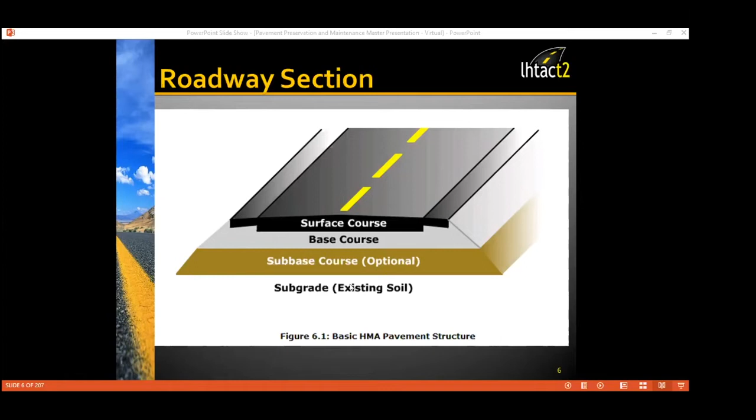So pavements are like the hat for the ground. They keep the water out and away, and in addition to that, they spread out the load. It's good to spread the loads out, or we'd be all driving on rutted pavement. We're also keeping the original ground dry, which is important, especially where the ground is soft and doesn't drain very well. We don't want to wear away materials that we have in place. We could also be faced with environmental issues if we were washing a lot of material off the roadway and into various drainage systems and streams.

Brent, your voice is fading just a little bit. I'm not sure if there's a microphone that needs to be adjusted. Okay, how's this? That's great, thank you.

All right, okay, so it's important to start the road building process with good materials, especially if we're rebuilding the road or putting in a new roadway, that are properly sized. So a sieve analysis allows us to break the materials into various sizes, and it provides a means to specify materials.

So if we're building a brand new roadway, typically we'll put into our contract, or specify somewhere, that we want a certain size of material.

So soils are generally classified into gravels, sands, silts, and clays.

A sieve analysis, or gradation test, is the procedure used to assess the particle size distribution or gradation of a granular material by allowing it to pass through a series of sieves of progressively smaller mesh sizes.

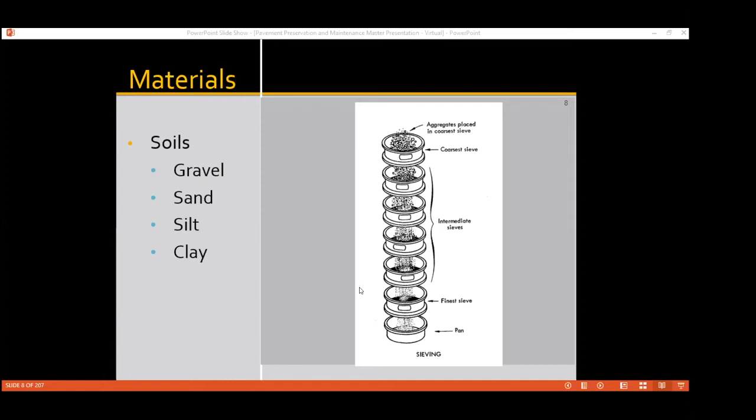A sieve analysis can be performed on any type of soil. We're not live here so I can't get a lot of feedback, but I'm curious if anybody has ever been involved with or used sieves or done sieve analysis - type something into the chat room and let me know. It's very important that as we build roadways, we have some way of classifying the material, and sieve analysis is really the best way to do that.

So this gives us an idea of what the sieves look like. Sieve sizes are given in inches. From the 1/4 inch on up, it's denoted by inches, and from the 1/4 inch on down, it's measured by the number of wires per inch in the sieve. So if somebody says, I have a number 30 sieve, that means you've got 30 wires per inch, all the way down to the finest sieve, which is number 200, meaning 200 wires per inch - pretty fine material. You can see from the picture what the various sizes of sieves look like.

It's important to have material that does not swell - swelling material really kills us because it heaves the roadway. Why wouldn't you want too many fines in the base material? Well, excessive fines will hold moisture and weaken the base. So when the base fails, no amount of pavement preservation will help you out. When we put down the base course - remember that's the layer below the asphalt layer - we want it to drain really freely, so we don't want a lot of fine material. That's why sieve analysis is very important when specifying something like a 3/4 inch minus gravel base.

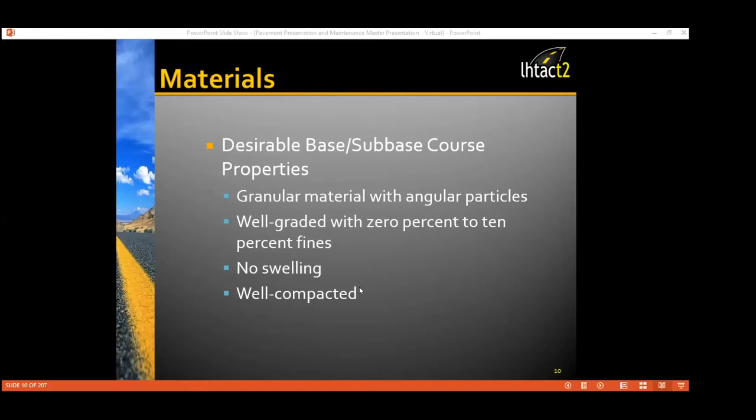As we look at some desirable properties for asphalt pavements, aggregates used in asphalt mixes need to be hard, really hard inert materials, such as good crushed gravel. Properly selected and graded aggregates are mixed with asphalt cement to form asphalt mixtures - I commonly refer to it as just mixing up black goo and rocks. Aggregates form the principal load-carrying component of the mix, and typically in asphalt mixes, the aggregate makes up about 90 to 95% of the mix.

Asphalt content typically ranges around 6%, 7%, sometimes 5%. So you can see most of our pavement is made up of aggregate, and that's where we get most of our strength, because the aggregate, if well graded and angular in shape, has point-to-point contact. If you add up all these little points, it really makes the pavement strong. Aggregates containing foreign matter such as vegetation, soft particles, clay coatings, clay lumps, and so on are not satisfactory to use in asphalt pavements.

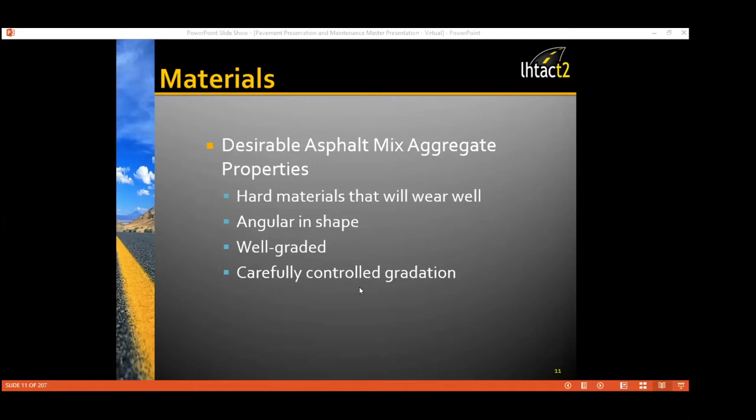Clean soils will have less than 5% fines, and dirty soils will have more than about 12% fines. So when we put our asphalt pavement together, we want material that's really well graded - we don't like a lot of fines in there, since that really lends to its strength. So we want a really carefully controlled gradation, which is why sieve analysis is really important in being able to put together our pavement mixes.

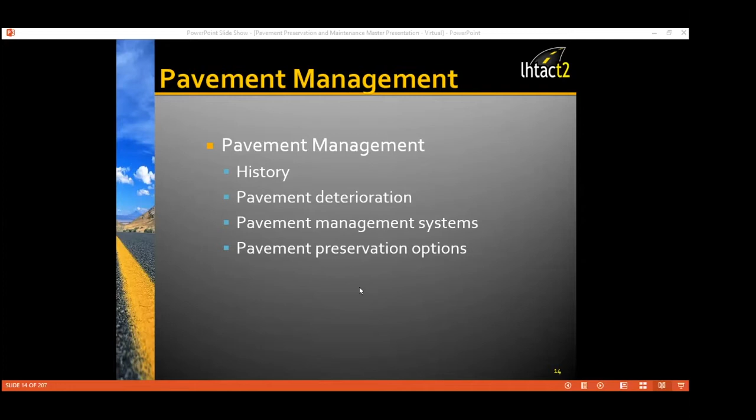So budget planners and managers want to know how much money it's going to cost to maintain a pavement to a certain condition level so proper planning can take place. We want to know how we can obtain the longest possible service life at the lowest possible cost, how many dollars it's going to take to maintain the roadway back to a desirable condition. And we certainly want to provide the public with safe roads.

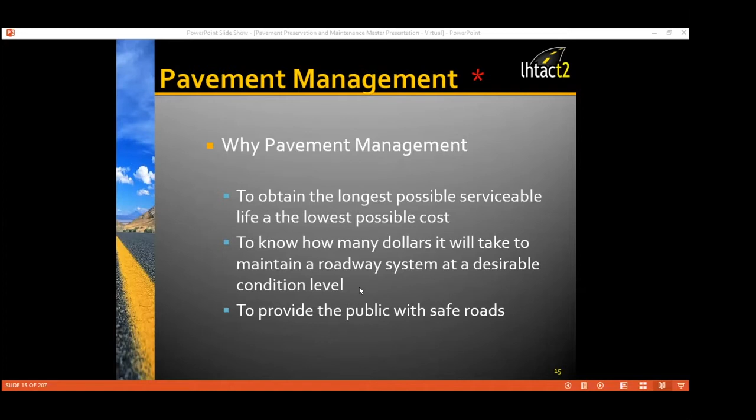So in the past, without some kind of management systems, roads got maintained either by a worst-first approach or prioritization through some kind of a politics process. Maybe that takes place even a little bit today. Hopefully not. But worst-first usually resulted in allowing the roadway to deteriorate to a point of complete failure, and then it got rebuilt.

So do you think any one of these strategies would result in the most efficient method for pavement management and the expenditure of tax dollars? Not really, but before agencies got into pavement management systems, this was the way that they did business.

We're going to go ahead and attack it worst first, which means we're going to spend a lot of money to fix the roadway that's in the worst shape, or perhaps you had some politician telling you where you're going to go spend your money and what you're going to go do first. But we can do better than that.

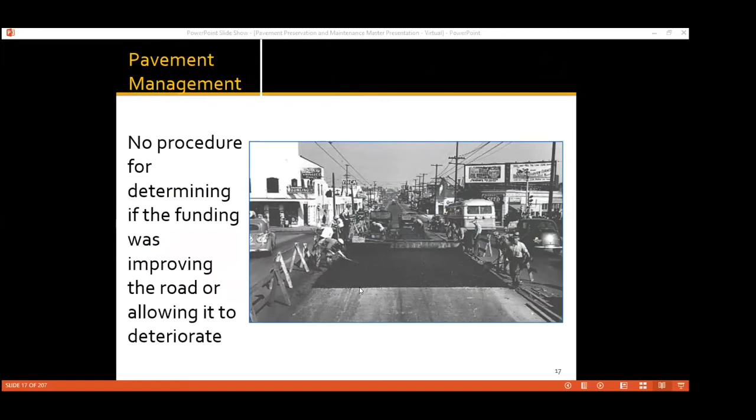So pavement management systems came along to help us prioritize our work. And without some kind of pavement management system, we really never knew if you were making progress or falling further and further behind in the maintenance of your roadway network. Determining if progress is being made was just kind of a bit of guesswork, because there was no procedure for determining if funding was improving the roadway or if we were just allowing it to further deteriorate.

So we needed an approach that would be quantifiable and objective, something we could kind of wrap our hands around. We were able to predict what pavement would do in the future as far as deterioration goes, and that we were able to recommend cost-effective pavement treatments so we could ensure that the money was being spent wisely.

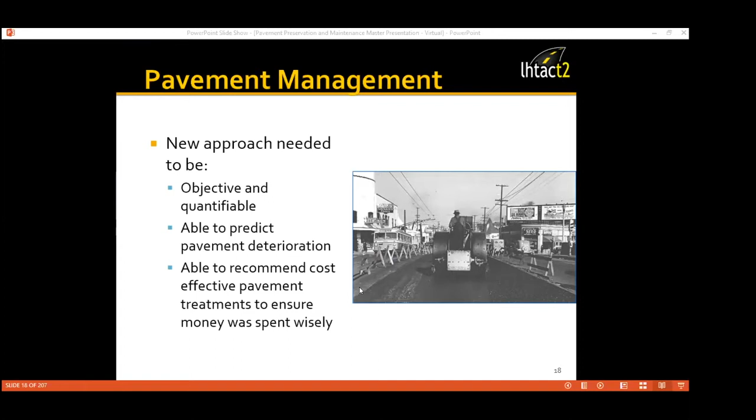And we weren't just going to let the roads fall apart and attack them from the worst-first scenario. We were going to try to preserve the pavement as it started to deteriorate. So in order to get out of that rut, a new approach needed to be developed.

So computers came along and they really had the ability to perform some kind of pavement management capabilities. Research has really shown us that it's far less expensive to keep a road in good condition than it is to repair it once it's deteriorated beyond hope. This is why pavement management systems place priority on preventative maintenance of roads in good condition rather than reconstructing roads in poor condition. In terms of lifetime cost and long-term pavement conditions, this results in better system performance of your roadway network.

Highway districts that concentrate on restoring their bad roads often find themselves circling into a black hole. You're restoring your bad roads, and by the time you've restored that road and spent all the money on it, all the rest of the roads have gone downhill to the point of no return. Now you have to jump over to those roadways and fix those, and you just get into that vicious cycle. Hopefully pavement management systems will help us determine the place to spend our money.

So I want to talk a little bit about preserving the roadway versus reconstructing the worst first. Years of pavement condition data shows that it's more economical to preserve the roadways rather than delay the repairs. As traffic levels increase, the cost of delaying repairs increases dramatically. I'll show you that in just a moment. It's not a linear relationship as far as the deterioration of the roadway - it gets to a certain point and then really drops off. So repairing the worst roads first is a very expensive way to operate your roadway system.

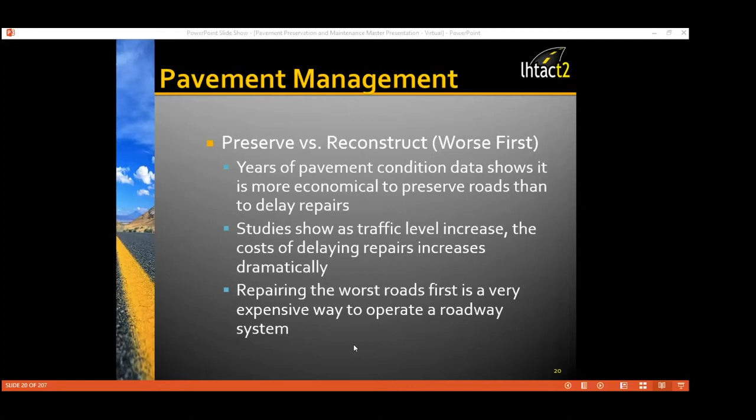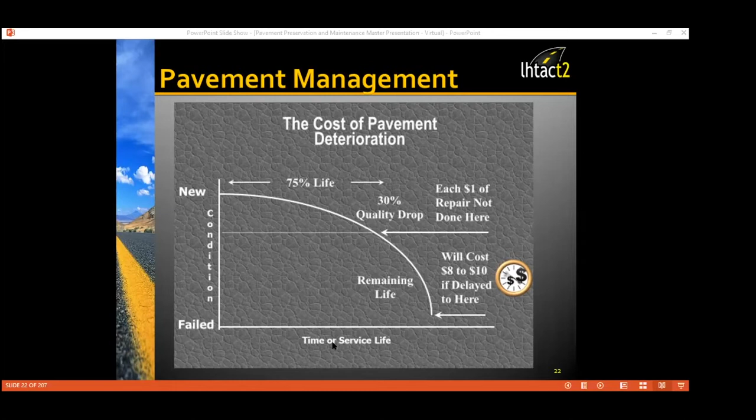So you can say it's like the Fram oil filter guy, pay me now or pay me later. But it's amazing that pavements get to a certain point and it's not a linear relationship, they just really drop off and will deteriorate quite rapidly if we don't maintain them. So the problem is pavements will deteriorate and those costs will increase dramatically if left unchecked.

So what causes the deterioration? We have two big causes that come to mind. The first cause is environment. We can think about the environment as the weathering of the pavement, or oxidation is a term that is commonly used. The second big cause of pavement deterioration is traffic loading. We can all agree that traffic is increasing all the time. In the area of the state where I live, traffic is going up quite substantially, especially truck traffic.

Utility cuts will cause the pavement to deteriorate. In fact, many agencies have policies in place whereby if we overlay the road or put down a new pavement, unless there's some big extreme emergency, we're not going to allow the utilities to cut the pavement for a certain period of time, or we won't allow any cuts. Sometimes it's like 3 years, sometimes it's 5 years, so every agency kind of has their own set of rules.

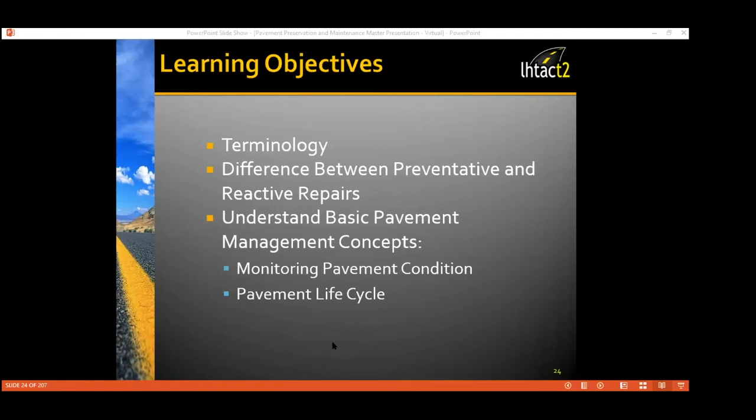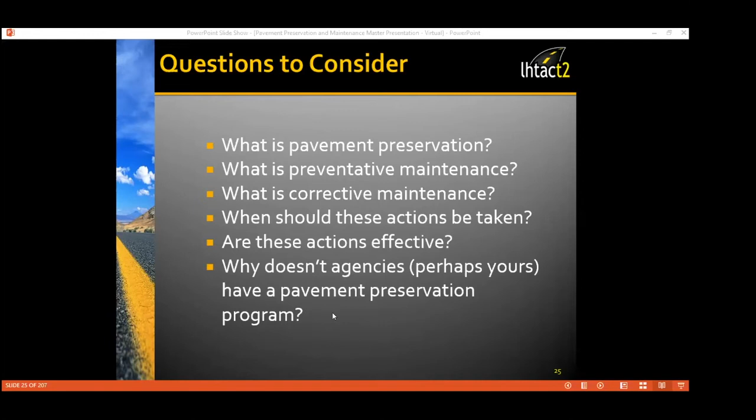So here are some questions we want to ask ourselves, some things to ponder. What is pavement preservation? We want to talk about what is preventative maintenance and what is corrective maintenance, and what is the difference between the two? When should these actions be taken? Are these actions of pavement maintenance management effective? And why doesn't your agency have a pavement management preservation type of program? These are just some questions to consider as we go through our slides.

AASHTO is the American Association of State Highway and Transportation Officials, and they have come up with a bit of a strategy definition: the planned strategy of cost-effective treatments to an existing roadway system and its appurtenances that preserves the system, retards future deterioration, and maintains or improves the functional condition of the system without increasing structural capacity. So that's their definition of effectively maintaining or preserving the pavement system. When we talk about structural capacity, we're talking about adding something to the roadway that will increase the load-bearing capacity of the roadway.

When we talk about preventative maintenance, we want to talk about planned maintenance, maintenance performed on good pavements, contributions to the long-term performance. When we think about preserving the pavement and doing preventative type maintenance, some things come to mind.

Some examples are fog seals, chip seals, and maybe putting down a thin overlay or thin hot mix asphalt overlay. This helps prevent deterioration of the roadway.

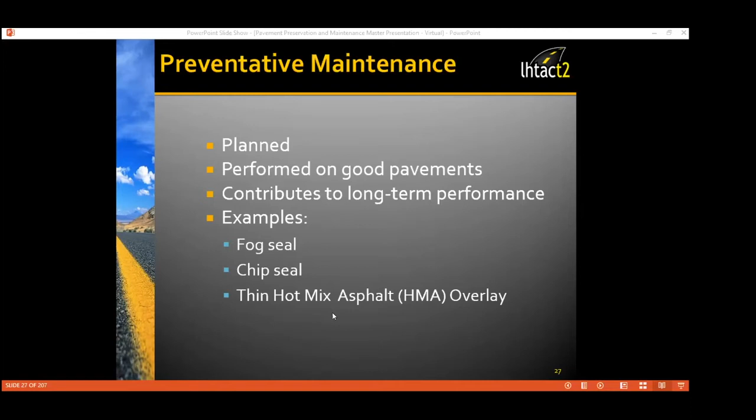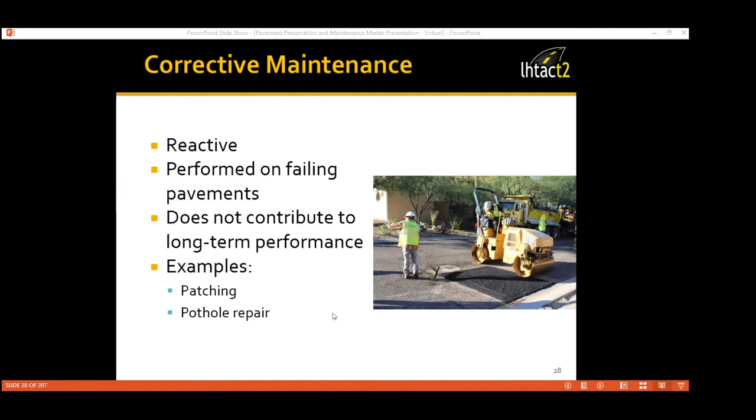Corrective maintenance we can think of as reactive. We're performing maintenance on pavements that are failing. A lot of times reactive maintenance does not contribute to the long-term performance, and it costs a lot of money to bring that pavement back up to a like-new condition. Some examples of this reactive nature are patching and pothole repair.

When we look at the system as a whole, pavement preservation is concluded to be a combination of corrective maintenance and preventative maintenance. Those two categories together give us our pavement preservation program.

The National Highway Institute sums it up this way: it's the sum of all activities undertaken to provide and maintain serviceable roadways. This includes corrective maintenance and preventative maintenance, as well as minor rehabilitation projects. When we think of minor rehabilitation projects, we might think of those thin lift overlays.

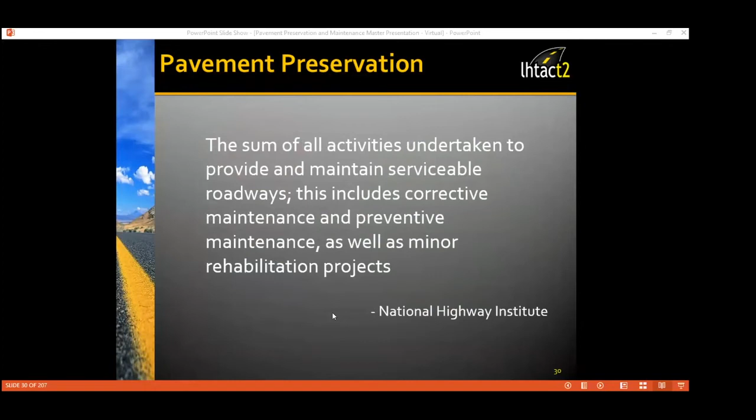When we look at undertaking work to extend the service life of our existing pavement, this includes restoration, such as placing an overlay. It also looks at other work required to return the roadway to its existing or original condition. We want to put in the work required to return the existing roadway to a condition of structural and functional adequacy.

When we talk about the structural adequacy of the roadway, we're talking about the load-bearing capacity. When we talk about the functional aspects, we're talking about things like lane width and how the roadway functions.

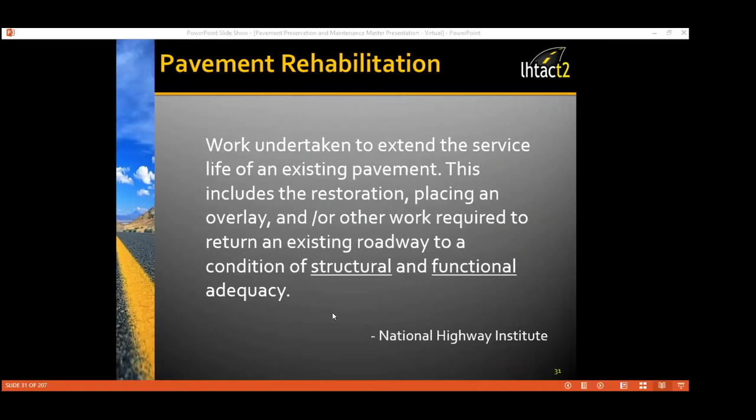This is where we sometimes take the biggest hit: if we go out and start doing preventative maintenance work, the public might perceive us as, why are you going out there and working on something that appears to be brand new?

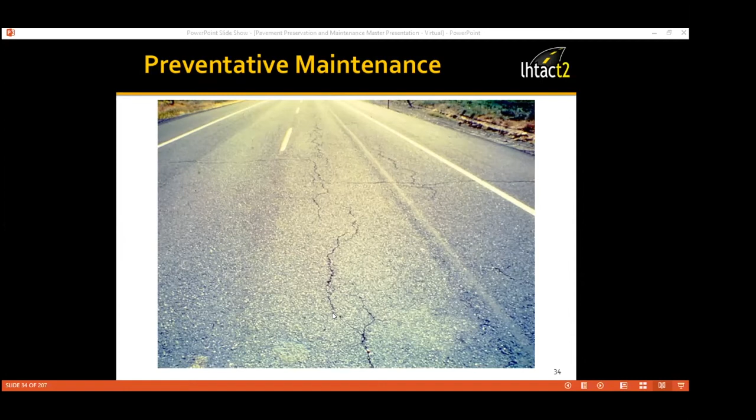Okay, so we've kind of passed that preventative maintenance window of opportunity, and we're finding ourselves further down that curve into a corrective or reactive type of maintenance, and it's going to start costing us quite a bit of money. So we think about this when we look at a roadway like this. Are there things we could have done earlier in the road's life cycle that would have brought it back to a like-new condition? And the answer is yes, we could have done that.

So when we look at routine maintenance, it's in our work plan. We've got the pavement in our pavement management system. We're trying to predict the future, and we know when we're going to go out there and do certain things to fix the pavement. So do we work on routine maintenance before deterioration? Well, not necessarily. And does it extend the facility or the pavement life? Usually does, though we say sometimes, but that's usually the case.

Reactive maintenance is thought of as unscheduled maintenance activities in response to events beyond the control of the maintenance organization. In other words, pothole patching, patching pavement blowups, unplugging drainage structures. And by the way, drainage is one of the biggest culprits of pavement deterioration, and we'll go over that a little bit later on. We can think of corrective as planned activities to repair deficiencies.

We just restore those elements of the highway to its original condition or increase the service life of the roadway or those facility elements. In other words, we're looking at doing partial depth repairs, patching of hot mix asphalt pavements, maybe some minor overlays.

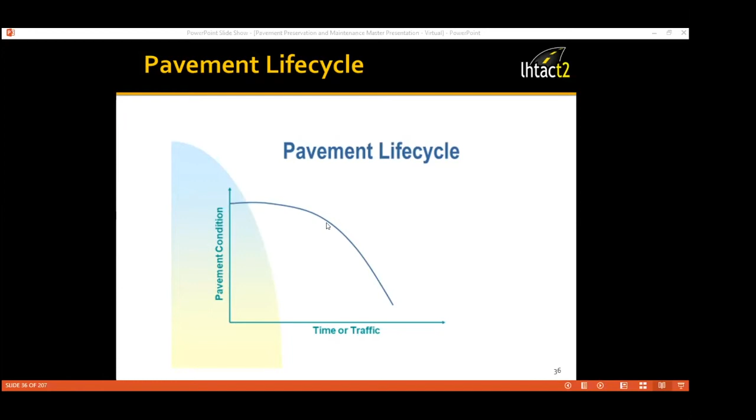So again, there's our pavement life cycle curve, with pavement condition on the left-hand side. If we have a new pavement, as time goes on, both load bearing, traffic—mainly truck traffic—and environmental conditions will deteriorate the pavement. It's not a linear function. We get to a certain point, and if we just let the pavement go and do nothing, the deterioration drops off pretty dramatically.

So how do we measure all this stuff? Many attempts have been made to measure and track pavement condition, and here are some of the few rating systems that have been used.

The first one is called the Pavement Condition Index. In this Pavement Condition Index, or PCI, 100 is excellent, and a PCI that equals 0 means your roadway has totally failed and has turned to rubble.

Another measurement system used in your pavement management system is the Present Service Index, or PSI. A PSI that's assigned a 5 is excellent, and if it's 0, it has failed.

The other one, which I don't think is as popular, is the International Roughness Index. You're rating the roadway surface smoothness, trying to gauge your roadway condition based upon smoothness. The public, that's how they gauge you, is the ride of the road—they feel the pavement condition in the seat of their pants.

Remember, everybody that has a driver's license is a self-proclaimed maintenance engineer or traffic engineer. The public will judge you mainly on how the roadway not only looks but also how it rides.

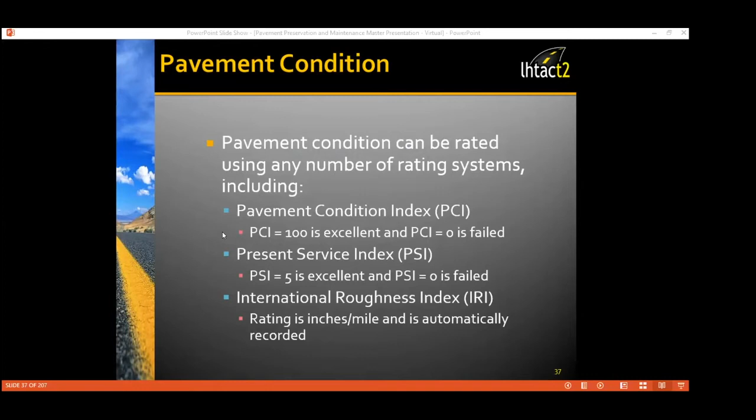So the most popular rating system is the Pavement Condition Index. It was invented by the Army Corps of Engineers and was developed mainly for airfields. The ASTM, the American Society for Testing and Materials, has developed standards for both highways and airfields.

If you look at the ASTM method for judging your roadway as you build your pavement management system, again, this is not rocket science—you can go out and just build a very simple spreadsheet. If you use their methodology, you can actually determine if your roadway is in excellent, good, fair, or poor condition.

Based upon what you see, you can analyze the distresses from the standpoint of the type of distress, the severity of the distress, and the density—we'll go over these in just a moment. You can assign a value and go out periodically to look at your pavements.

You can say, okay, I can see there's further deterioration. I can then come back to our magic curve and really plan my work. I want to do my work when I can do the preventative maintenance type of work, because it will save me quite a bit of money.

Which will cost us more money. So if we look at this pavement and we're able to use this method to try to determine the condition of the pavement through this pavement condition index, we come up with that value of 88. We say, okay, well, if I can do this with my roadways and throughout my entire network of roadways, then I can kind of get a feel for the condition of my pavement.

And I can start planning my work, and I can plan my budget and think, okay, what do I want to attack first? What do I want to attack second? And I really want to try to stay on top of things through that preventative maintenance mode.

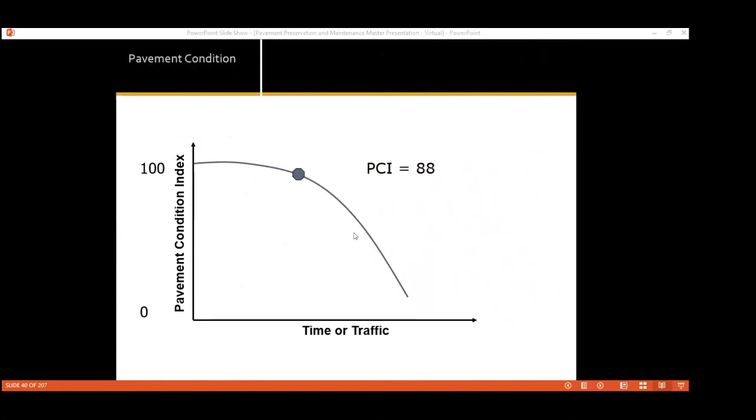So when pavement condition, the critical PCI number is thought of right about the 65 or 70% range. It's like, you know, that's really going to start costing me a lot of money if I let this pavement go further without some type of corrective action work. So when I get into that 65 or 70 PCI number range, at this point, the pavement is really starting to deteriorate.

And so again, notice that the curve drops off rapidly. It's not linear. And so if I let this roadway go much longer without some kind of preventative maintenance type of work, then I'm going to be in trouble, and I'm going to have to start spending some serious money, and it might do some bad things to my budget.

So again, I can't emphasize this enough, is that this is why it's very important to try to develop some kind of a simple pavement type of management system so we can stay ahead of the curve and stay in the preventative maintenance range, stay away from that critical PCI number of 65 to 70, and stay out of this range of doing corrective maintenance, some rehabilitation, or worse yet, the roadway has deteriorated so bad that we have to do some kind of total reconstruction.

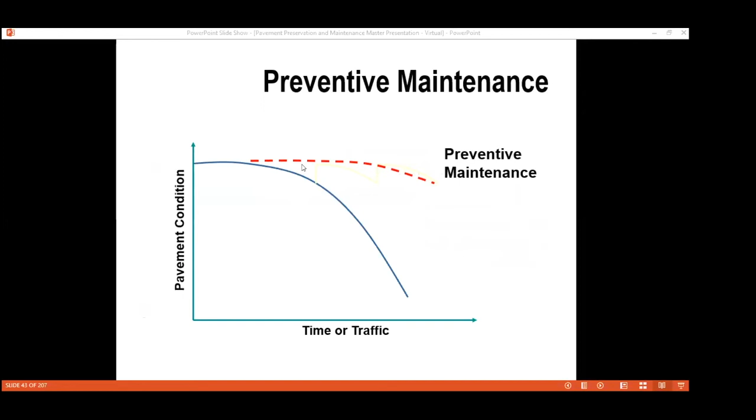So we can think of preventative maintenance again as: if we put money into the roadway in the top portion of this curve and bring the pavement condition back up to like a like-new condition - you're never going to get back to brand new, but like-new condition - then this is what our curve kind of looks like when we apply our dollars doing preventative maintenance.

Corrective maintenance, we're going to start plowing a lot of money into our pavement, but we're only going to bring it back to a certain point, and it's going to start deteriorating again. So again, when we're in our corrective maintenance mode, we start chasing our tail around the room, and we're putting money into the pavement.

And if we're not making marked improvements to the pavement from a structural or a functional standpoint, then we're starting to kind of waste money. So when we look at doing rehabilitation, so when we do corrective repairs, deep pothole patching, deep crack sealing, that type of thing, we're only going to bring the roadway back to a certain point.

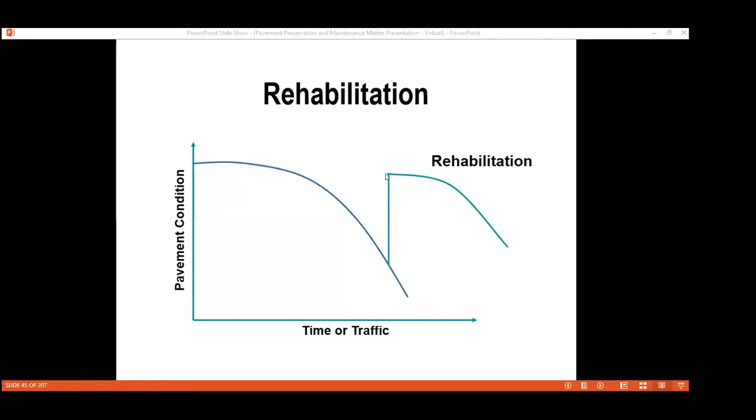If we're doing a rehabilitation project, it's going to cost us quite a bit of money, like an overlay or a mill and inlay. We're only going to bring it back to a certain point. We'll certainly bring it back more towards that new condition, but we'll start to deteriorate again. And reconstruction, of course, will bring us back to that new point, but reconstruction is very costly.

And so we find ourselves spending all of our money on reconstruction projects, and then we don't have any money left over to do preventative maintenance on the rest of our system. Pretty soon they deteriorate to a point that we have to do reconstruction there. And again, we just get into that vicious cycle.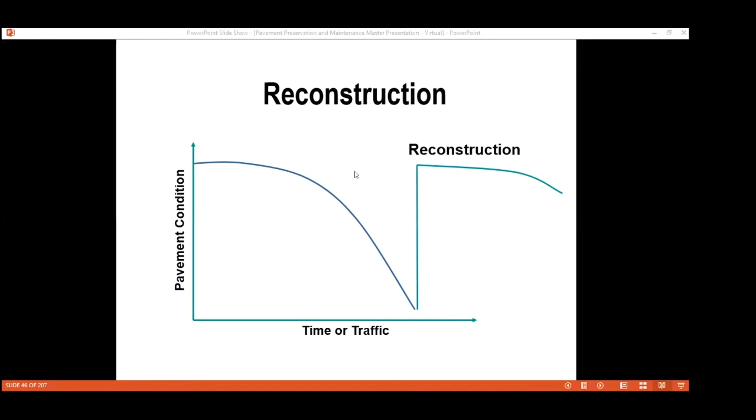And so the whole idea behind the pavement preservation strategy is pretty simple. And again, if we can have a system in place to track the condition of our pavements, our big goal is to try to apply the right treatment to the right pavement at the right time. And that's a lot easier said than done.

When we look at pavement preservation benefits, a nationwide survey of public opinion was performed as part of a national quality initiative on pavements. It showed only a moderate level of satisfaction with the highway system, and noted there is considerable opportunity for improving public satisfaction. The public is very concerned about how taxpayer dollars are used and wants to make sure they're used in a cost-effective manner.

The public prefers permanent repairs rather than something temporary in nature, and that really only makes sense.

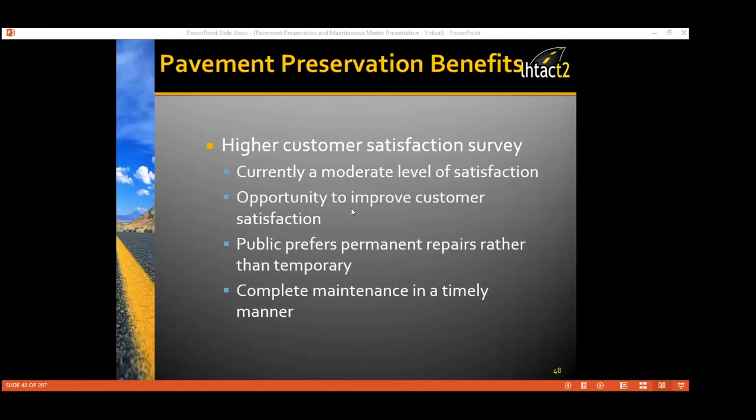A reasonable expectation of preventative maintenance is that over time, you, your agency, and the traveling public can expect improved pavement performance. This may seem backwards, but at times it is best to let pavements go and reconstruct them rather than throwing money down a rat hole.

Sometimes we have to recognize that if the pavement has deteriorated so poorly, you're just better off to bite the bullet and let it go. You're going to have to plan and budget something into the future that takes you to a reconstruction project. It seems backwards, but more and more people have found out that's the best way to go rather than try to fix something that really can't be fixed.

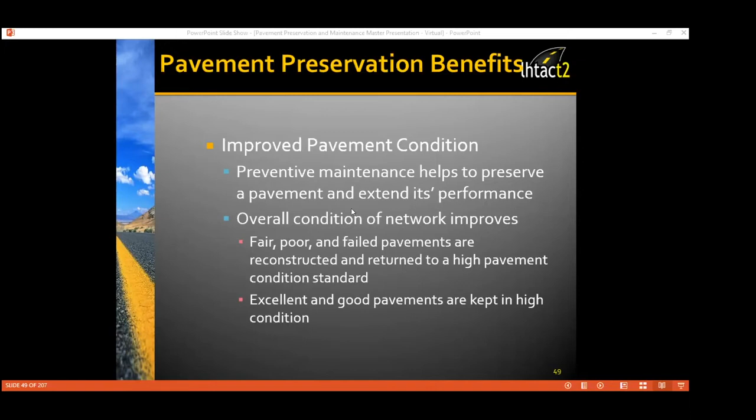When we look at further pavement preservation benefits, cost savings is certainly an intended benefit, but sometimes it's hard to prove. Savings can be in terms of less expensive treatments, longer pavement lives, and cost benefits to the roadway user, such as fewer delays and deterioration of vehicles and other roadway equipment. The real benefit is in the cost effectiveness of treatments that may extend the life of the pavement. If we are able to use less expensive treatments and extend pavement life, we can enjoy some of those cost benefits.

Safety is a top priority for users. Safety appears over and over again in surveys of users as their most important concern. They want safe roadways. Idaho does have a strategic goal to reduce fatal and injury crash rates. If any of you have been to any of my other workshops, I've talked about safety and the cost impacts of fatalities and serious injuries to all Idahoans.

Safety can be improved by using treatments that are safer to operate on, by having better operating conditions, and by minimizing repairs. One benefit that everybody can recognize is seal coats, which increase skid resistance and friction on the roadway, helping cars stop better and keep cars on the roadway as they go around corners.

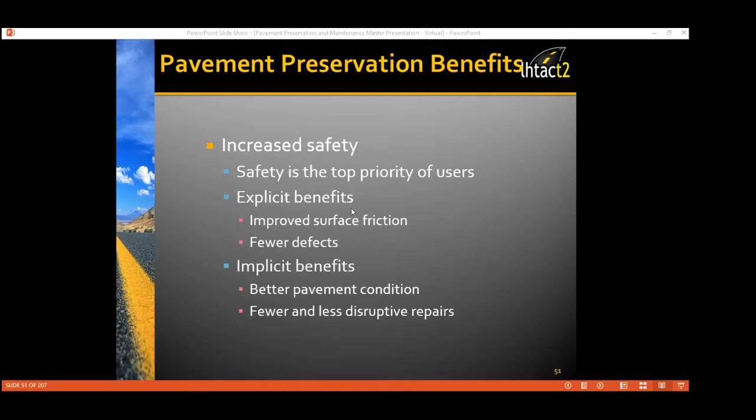Here are some additional benefits of a preventative maintenance program. It can provide greater stability to both you and the construction workforce. What I mean by that is if you get into a good preventative maintenance program with a good pavement management system, you can look at your network of roadways and determine the best time to do preventative maintenance actions. You're going to have a more stable budget, able to spread your dollars around your network, making the poor taxpayer a little bit happier.

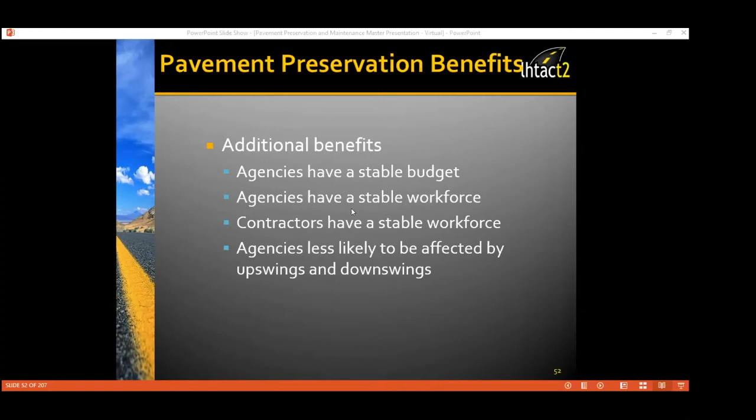You'll have a more stable workforce if you're doing preventative maintenance. What I mean is you're going out and making a big difference, so nobody's asking why are we doing this, what's the point. So you have a better workforce. Contractors will have more of a stable workforce too, because if you're hiring them to do the work on a cyclical basis, they know they're going to have work into the future. You're less likely to be affected by upswings and downswings, not running around chasing your tail.

So here are some implementation challenges. One barrier to implementing preventative maintenance programs—again, we're not talking about corrective maintenance, we're talking about just the things that we do in preventing roadway deterioration.

One barrier to implementing preventative maintenance programs is public perception, believe it or not. The public may not accept the move away from the worst-first strategy. In other words, if you're faced with having to let a road go because you don't have the money right now, and instead budget for a reconstruction project in the future, they might not accept that strategy.

Put another way, the concern is that the public is unable to place the general good above their own personal interests sometimes. Agencies only receive complaints about failed roadways. So if you go out and do preventative maintenance on roadways that actually look pretty good, but we know they're starting to deteriorate—oxidizing or getting hairline cracks—these are things we want to pay attention to. Sometimes the public doesn't realize that, and you might get criticized for working on a roadway that appears to not need attention, while another roadway you're having to let go needs the most attention. So you'll get, why are we working on what appears to be good pavements and ignoring pavements that are bad? That is one challenge to implementation.

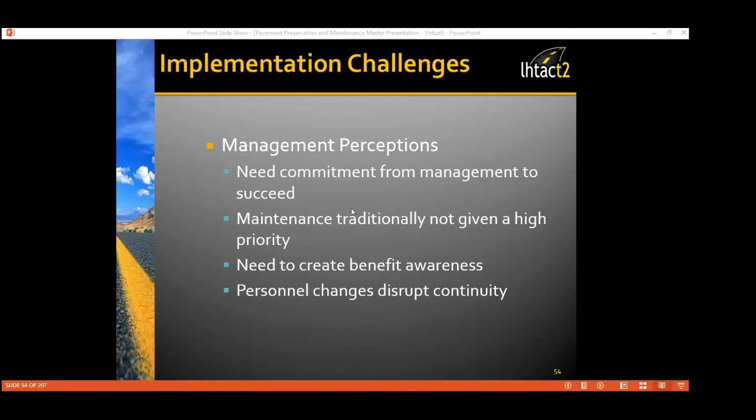So putting it all into a bit of a summary, agencies that have implemented preventative maintenance programs have done so for a desire of one or more of these benefits. They believe the roadway will last longer, so they'll enjoy higher customer satisfaction, but also preventative maintenance programs coupled with a pavement management system will help with better informed decisions.

I can start to plan the future, plan my budget, and plan my work. So you can come up with more informed decisions to improve your strategies and techniques. You'll enjoy improved pavement condition, cost savings, and be able to spread your budget around more effectively within your entire network.

You'll enjoy increased safety—that's very high on the public's list. And you'll also enjoy program stability. What I mean by program stability is that you'll enjoy having a good budget management future type of program, whereby your program of preserving your highways enjoys stability.

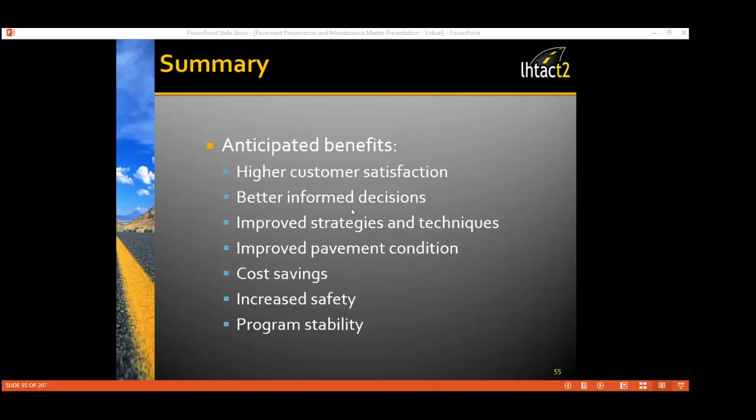So to summarize, some of these challenges can be in public perception, and some can also be in management perception. If the managers who manage the agencies, on up to the board of directors, are still stuck in this worst-first scenario, or politics is still driving some decisions, those methods have been proven not really effective for preserving pavements and having a good working system.

Just another polling question here as we wrap up this first segment. Does your agency have a preventative or corrective maintenance program? If you were to classify your agency, are you more into prevention, or more into reaction, or you don't know?

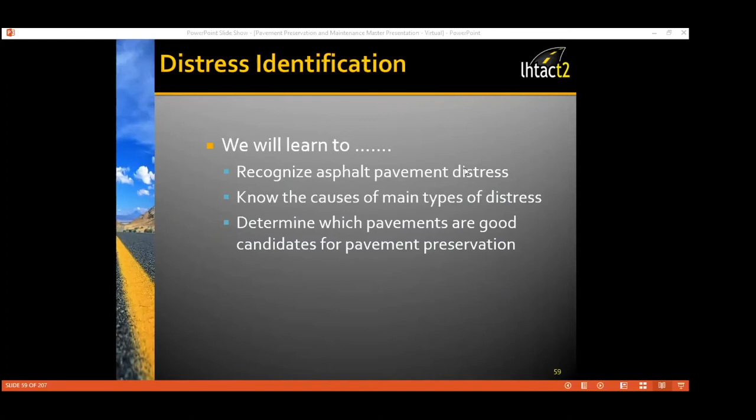So when we look at pavement condition, let's define what we mean by pavement condition. Typically, a discussion of pavement condition is thought of as what you can see on the pavement surface. But as we've indicated, what you don't see can be more important in determining how the pavement is performing and where the pavement sits on that deterioration curve.

So when we talk about functional performance, we can think of it mainly as ride and safety. Aspects of ride quality include smoothness, and also noise. Safety includes the friction of the pavement surface, and it also involves the removal of standing water. Pavements that rut exhibit standing water, and it becomes a real safety issue because of hydroplaning.

So what are some indicators of pavement functionality? We can think of rough ride, wet weather crashes, standing water, noise, ride quality, surface friction, and surface drainage. With rutted pavements, I have found that standing water and hydroplaning crashes attract the attention of lawyers. You might be faced with somebody coming through the door saying, I've crashed my car and severely injured myself because your pavement was in poor condition from a functional standpoint.

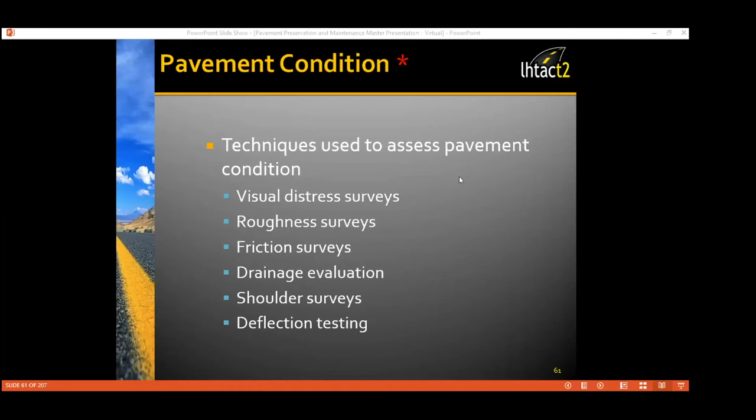We can look at roughness or friction surveys, which are functional related assessments. We can also look at drainage evaluations, which can be helpful in preventing structural problems. I've walked the roadway in my prior life, and paying attention to making sure cross drains are not plugged, ensuring good drainage, really makes the pavement last longer. We can also do deflection testing, which provides information regarding the structural condition of the pavement and what the underlying layers are doing for us.

So when we look at pavement condition, we can do road condition surveys. Current road conditions are very important. These surveys can vary from simply walking or driving the roadway to using more sophisticated equipment. Again, we don't want to get wrapped around the axle - we don't have to have a lot of sophisticated equipment to go out there and determine the condition of our roadway, and start looking at where our pavement is beginning to distress.

So we can look at pavement testing from the standpoint of ride comfort and structural adequacy. There are methodologies to go out and do testing that's destructive and non-destructive. For instance, some tests done to look at structural capacity don't tear up the pavement, such as a falling weight deflectometer.

Sometimes you have to go out and core the pavement if you need to see what's going on underneath, using something like a 4-inch core, or sometimes even a 10-inch core. You core down through the various layers of the pavement to get an indication of what the pavement is doing and what it consists of. These tests can be expensive, but they're basically used for the design or rehabilitation of projects, so you can design the roadway pavement section properly. Certainly when reconstructing the roadway, this testing is very important.

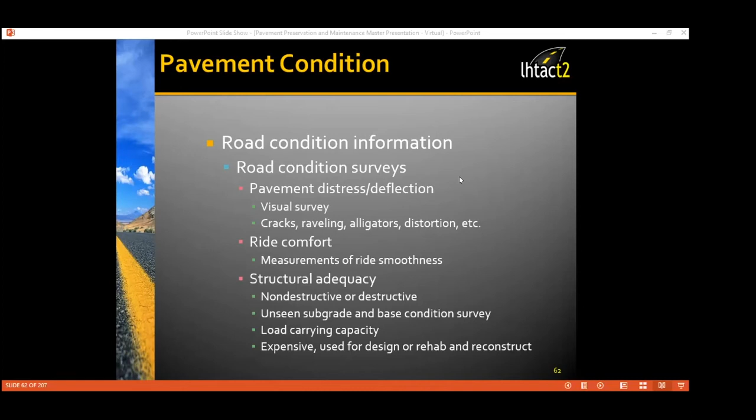So pavement distress and deflection is important. When looking at pavement distress, it's usually performed by one or two people who walk the roadway or use a slow moving vehicle to look at the surface of the pavement and see what kind of distress you have. There are also ways to determine pavement distress and deflection by automatic means.

You can do this visual survey, and there are very sophisticated systems out there. ITD has one I call the Star Wars van - we'll see a picture of that in just a moment - where they can run this van down the roadway and look at cracking, rutting, distortion, raveling, and record all this information into their pavement management system.

You can also look at ways pavements are assessed for ride comfort or smoothness. You can use a profilograph - there's the California profilograph - or you can use a radar type of system, which is pretty sophisticated and mounted on a glorified golf cart.

So here are the two systems. The top one is called the California profilograph - you have to push this thing down the roadway. There's a tire that runs on top of the roadway surface and records the smoothness, which is a functional classification of how your roadway is performing. The bottom one is the glorified golf cart - you run it down the highway and it uses radar to determine the smoothness of your pavement.

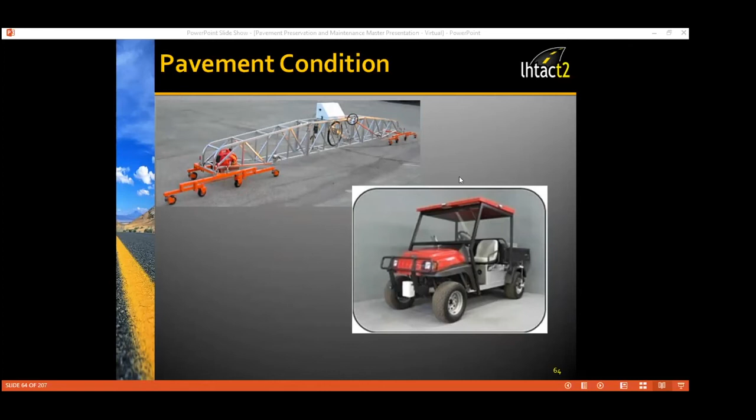People really love the golf cart. They don't like the California profilograph, especially when you're pushing that thing uphill. Pavement distress and deflections.

You set it up on the roadway. There's sensors that you put down on the roadway, and there's this big weight. People call it the thumper sometimes. It's this big weight that falls and it kind of shocks the pavement. And through programs and electronics, you can determine what the strength of your pavement is, and also you can determine to a relative degree of accuracy how strong your base or sub base is and what the condition of that material might be.

It can be a bit expensive to run one of these things, but if you're real serious about designing, if you're going to get into a rehabilitation project on your roadway, sometimes it's really nice to know what the condition of your roadway is, especially if you're going to start adding layers to increase the structural capability of the roadway, layers of asphalt. It's a good idea to determine what you've got, because if you can't determine what you have, you'll find yourself just out there kind of guessing.

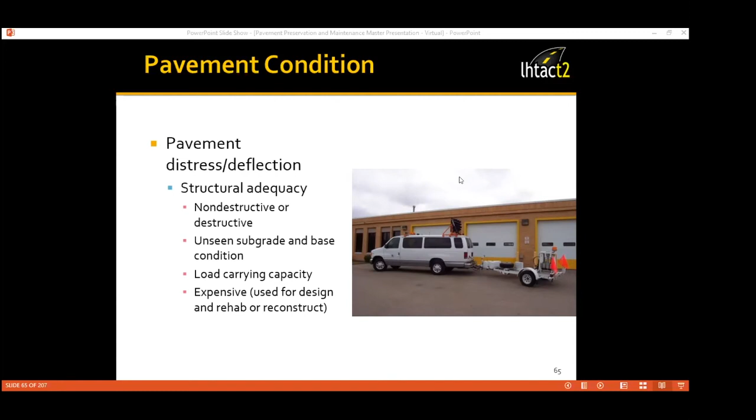It'll do the cross slope. It'll put your pavement on a GPS system to where you can go out and actually pull it up later in mapping programs and so on. And you can actually pick up features like roadway signs, guardrail, and so on to really get a total picture of your whole roadway and how you can put that all together into a management system. Most people probably aren't going to use this, but it is available if you're ever interested.

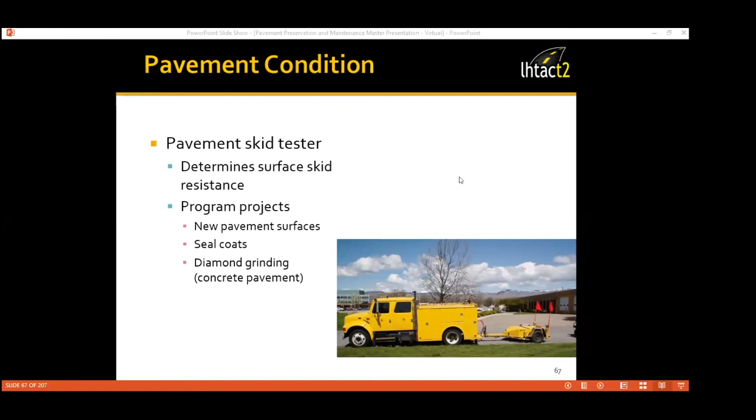Here's a picture of a pavement skid tester. It determines the surface resistance. We're very interested sometimes in knowing what the surface is doing from a frictional standpoint, and it helps us maybe determine when we're going to do seal coats and where we want to do seal coats. It's also used when we're diamond grinding concrete pavement. A lot of us really don't have concrete pavements.

So those are just some of the things that can be used to help determine how our pavements are distressed and how they have deteriorated. So in order to apply some appropriate pavement preventative maintenance program at the optimal time, remember our whole goal is to do the right thing at the right time on the right section of roadway. So a good understanding of a typical progression of roadway deterioration has to be understood.

No matter how well constructed a pavement is, it's going to deteriorate over time as a function of repeated climatic cycles, environmental, and traffic loadings. When trying to determine appropriate pavement measures, we want to ask, how do I expect the pavements to perform? We want to get a really good feel for typical performance of a pavement in a particular location for climate and traffic loading. So variation swings can be great in pavement performance due to changes in many characteristics such as the environment, the design, and the construction and so forth of that pavement.

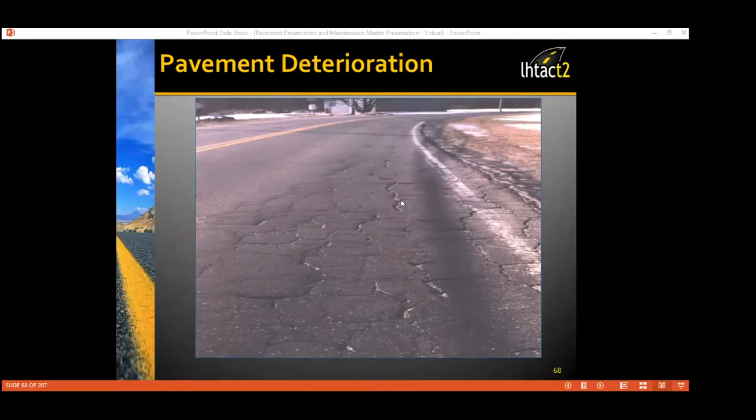So preventive maintenance prolongs the pavement in an economic manner. So you can see that this pavement is deteriorating quite rapidly. I mean, we can see that it's not in very good condition. It's probably gone out of the preventative maintenance area on the curve and is probably more into the corrective action.

So, distress categories. How does construction contribute to distress, you might ask? Well, if we have poor construction practices, we can have rough joints. Poor workmanship of the pavement will contribute to roughness. We can have segregation of the plant mix pavement itself. It's kind of falling apart, it's not well graded. And then we can have poor production of the hot mix asphalt coming out of the plant, with incorrect asphalt content and incorrect gradation of aggregate. So construction methodology itself can contribute to distress or premature distress of the pavement.

But our big ones are load and the climate or environment.

So when we think about load-related stresses, we can think about different types of cracking. If you go out and look at the pavement and how it's cracking and what it looks like, it can give you an idea of what's causing the distress. Whether you have just a pavement problem, or base layers that are failing, or poor drainage, that's what we need to talk about and look at.

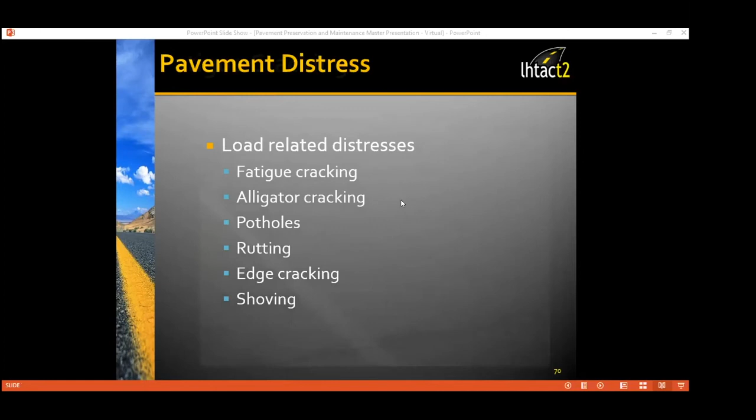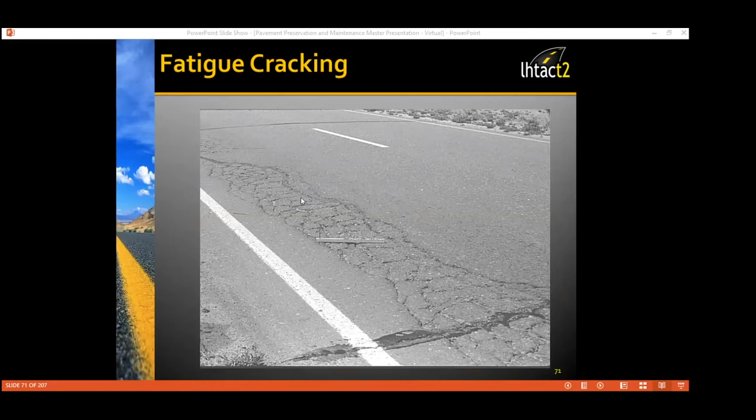I want to show you a picture of longitudinal cracking. When we look at this type of cracking, it's typically caused by overloading, so the pavement has failed basically because of repetitious loads. That's why it's important to have some weight control type of processes. I know people get out sometimes and set up scales to weigh the trucks to make sure trucks are running legal.

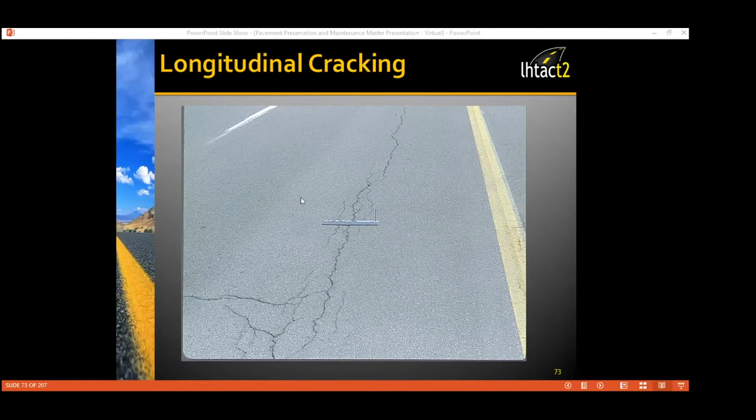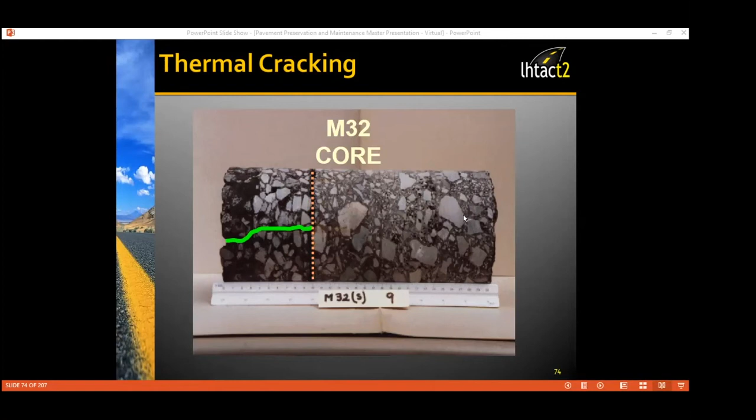Here's a picture of thermal cracking. You can see the green line. The goal is to keep this crack from propagating to the bottom of the plant mix and contributing to premature failure of the roadway. So if we can seal this crack and keep it from propagating clear to the bottom of this layer of plant mix, then we have a better chance of preserving the pavement. That's just kind of a cross section to show you what a thermal crack might look like.

Subgrade and base, and pavement design problems, can contribute to pavement rutting. You can have failure of subgrade and base that will cause pavement rutting, but also pavement rutting can come about through the pavement layer itself, the plastic flow of the material in the mix design. Perhaps we didn't have very good consolidation or compaction of the roadway when it was built, so guess what, the cars and trucks are going to compact it further for you and cause ruts. Pavement rutting can really come about through severe surface wear as well.

So when we talk about rutting and plastic flow, either we've got crappy material - we didn't have really good graded material, or material that was crushed properly to give us good angularity of the pavement particles, since most of our strength comes from that point-to-point contact of the aggregate particles - or we had a bad mix design. One of the culprits of a bad mix design is too much asphalt was put into the mix, so the mix is going to have more plastic flow in nature. As we have repeated loads go over the plant mix pavement with a bad mix design, maybe with too much asphalt, rutting will start to show up.

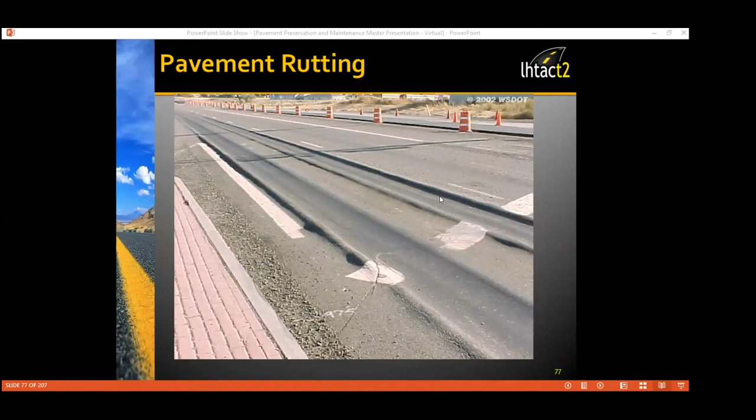Here's a pavement that is really badly rutted, and I would say the pavement itself has a real problem - it might be a really bad mix design. You can see the travel lanes are severely rutted versus the passing lanes. It looks like this is a four-lane section, and probably a lot of heavy truck traffic contributes to this really bad rutting.

Another type of pavement distress is potholes.

Potholes can really be severe. They're kind of a result of other types of distresses. Alligator cracking, potholes can start with alligator cracking. Potholes can start with raveling. Potholes can start with failed patches. And potholes can start when we have a thin or weak pavement, meaning it wasn't adequately designed to carry the load. So repeated loads will start potholes.

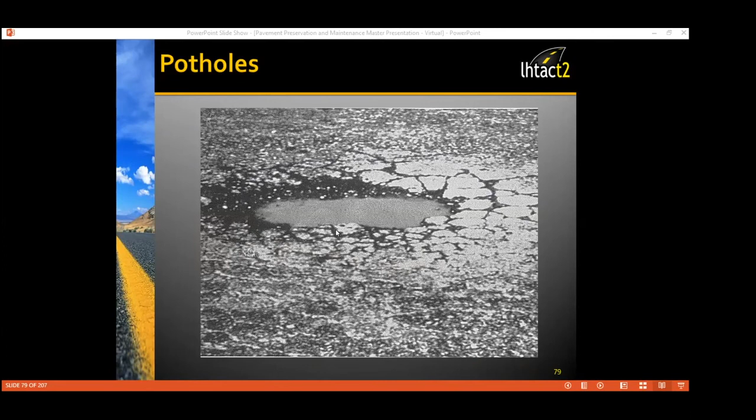So here it is, a typical pothole. We've all seen those and we have to combat them. Note the alligator cracking around the pothole. This all started with some kind of alligator cracking taking place. If we didn't do preventative maintenance, if we weren't able to take care of it right away, then as time goes on, water gets in, freeze-thaw takes place, and the pothole is born, and sections of the pavement come apart and come out. And the traveling public really loves potholes. Here's just another picture of a pothole.

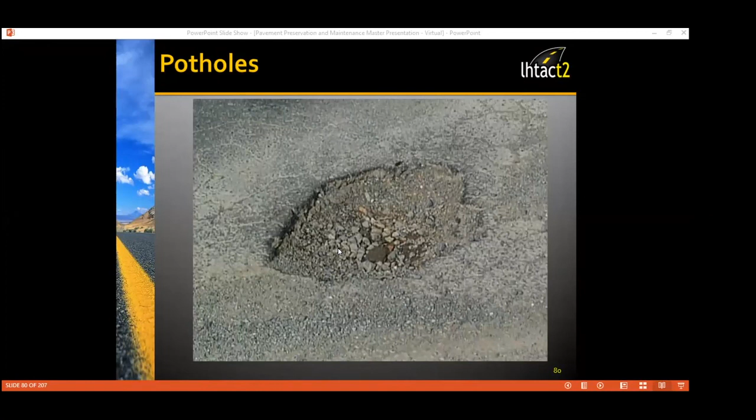Edge cracking is another type of pavement distress we're combating. There's poor lateral support on the edge of the pavement that contributes to edge cracking. Many times edge cracking is caused by some kind of settlement of underlying material, and that settlement can be brought about by poor drainage along the roadway, with water seeping in on the edge. Frost heaves will certainly contribute to edge cracking, and we can have shrinkage or drying of the soil if we've got bad soil that swells or shrinks. It contributes to edge cracking and is really aggravated by high traffic levels. Also narrow lanes, and if we're running a lot of truck traffic, we'll see a lot of edge cracking.

So here's a picture of edge cracking. You can see right along the fog line—this is probably a pretty narrow section of pavement. Doesn't look like there's much shoulder there, so you probably got traffic loads running pretty close to the edge. You might have some drainage problems along here too that contribute to the edge cracking.

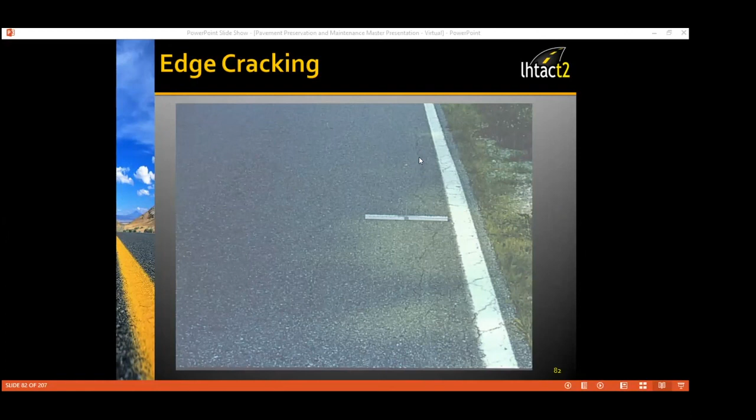Shoving or washboarding of pavements—a lot of times shoving of plant mix pavements takes place at intersections where we have a lot of turning movements and truck traffic. It'll start to shove the pavement around. That's why I'm seeing more and more intersections in higher traffic volume urban areas being constructed with concrete rather than asphalt. They'll pave asphalt up to the intersection, but the intersection itself is done with concrete. So these occur at intersections, also steep grades where there's a lot of loading onto the pavement as traffic tries to climb hills.

Ramps too. Shoving can be caused by a weak or unstable mix, if you've got a bad mix design or some kind of unstable base. Here's a nice picture of shoving—you can see the plant mix pavement being shoved up against a hard object, in this case a curb. To fix this is going to be quite expensive. You pretty much have to go out and remove the pavement, either mill it out or remove it totally, and you find yourself in a big rehabilitation project or a total reconstruction of the pavement.

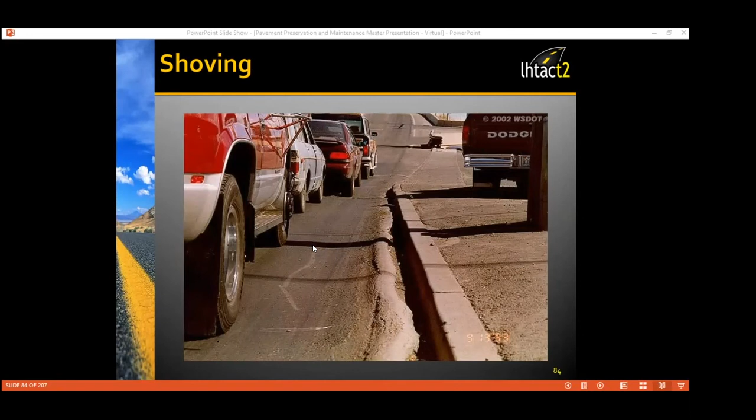Climate-related stresses will cause block cracking. The pavement itself will just crack into big, huge, gigantic blocks. It's interesting that with block cracking, or in many cases thermal cracking, it will occur at a regular interval or interspace. For instance, going down the roadway, thermal cracking might occur about every 40 feet or so.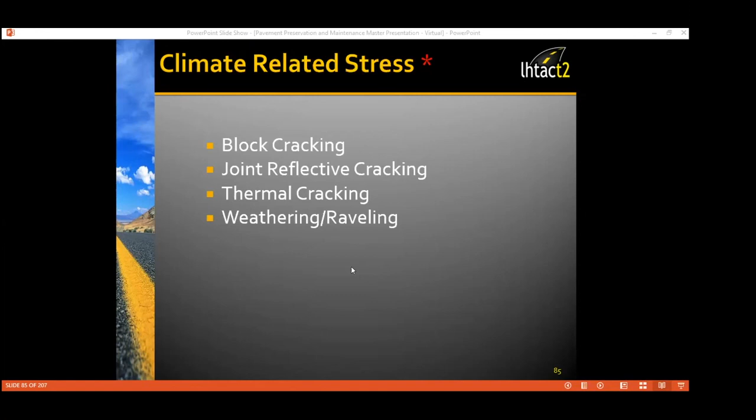Another pavement distress caused by climate is weathering or raveling. Thermal cracking can come about if the pavement put down didn't have the proper grade of asphalt. Asphalt doesn't just come out of the ground, go through a distillation process, and one size fits all—there are various grades of asphalt. You want to pick the grade that works best for your climate, and sometimes people don't key in on that and pick the wrong grade. The asphalt gets brittle and hard in colder climates and won't do well through thermal cycles as the pavement heats up and cools down, so you get thermal cracking at a regular interval in the highway.

So block cracking really divides the pavement into rectangular pieces. They can range from about a foot by foot up to a 10 by 10 foot type of cracking.

Oxidation can cause block cracking, as well as low asphalt content in the mix design, and also aggregates that are very absorptive. In other words, they will suck up the oil as it's mixed together with the aggregate. If you have highly absorptive aggregates, a lot of the oil gets sucked into those aggregates, and you don't have enough oil left over to essentially glue the rocks together.

So it's very important when we do plant mix and mix designs that we understand not only how the aggregate behaves from a gradation standpoint—remember at the beginning we talked about sieves and sieve analysis and sizing the aggregate—but we also want to determine how absorptive our aggregate is, because that will be very important when we select the amount of asphalt we're going to put into the mix design.

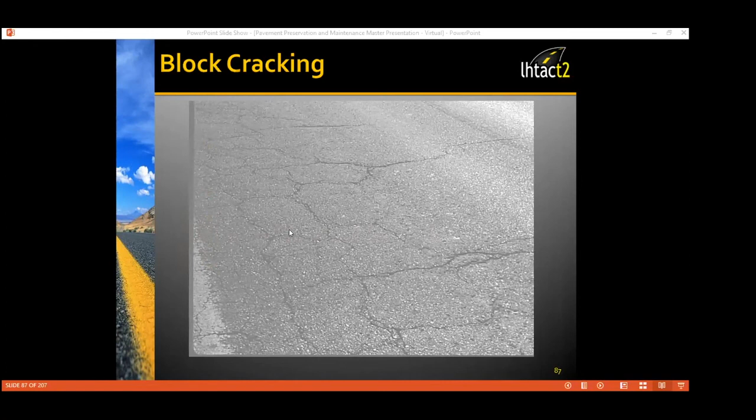So here's a picture of typical block cracking, and just like the name denotes, it cracks in blocks, 1 foot by 1 foot to 10 foot by 10 foot, all various sizes, but they seem to be fairly uniform in size.

Reflective cracking, another pavement distress that's important to us, is caused by the movement of the underlying layer. Vertically, we have reflective cracking that takes place from loading—or longitudinally is really a better word, going up and down the length of the pavement. It's typically caused by loads, as we saw a little bit earlier. Horizontally, reflective cracking is caused by thermal cracking.

If we can't take care of cracking, and we put another pavement layer on top of an existing pavement that has these working cracks, caused by movement of the underlying layers, typically those cracks will propagate up through our new plant mix pavement, and we'll have that crack itself. So we're really not solving it totally when we put on a new layer of pavement. The cracking will temporarily go away, but these working cracks, or reflective cracks, will eventually work their way up through the new pavement layer.

Some people have tried to combat this by putting down some type of stress absorbing membrane before they do their overlay, and those tend to work reasonably well. I don't know if they cure the problem totally, so it just depends upon the type of material you're going to put down and the type of membrane. It's something to think of if you're going to try to combat reflective cracking.

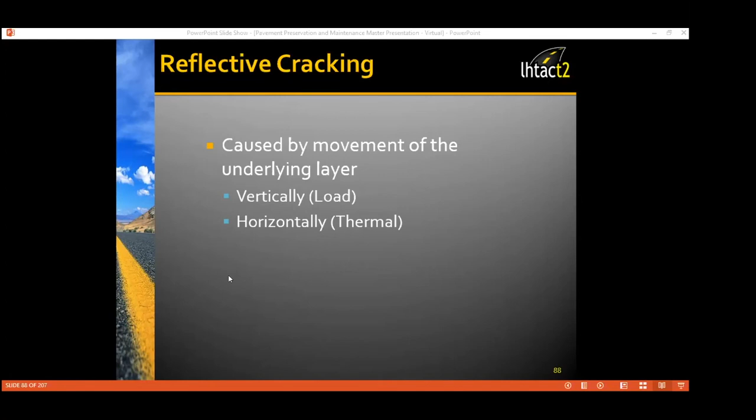So, longitudinal and transverse cracks. Transverse cracking is generally almost always thermally induced, by the environment—pavements expand and contract over time. Longitudinal cracking typically shows up because of poor paving lane joints. When contractors put the joint together, they don't do a good job of compacting it, and in a very short period of time you'll have paving lane joints showing up the entire length of your pavement. Typically, it's just poor joint construction, mainly poor compaction.

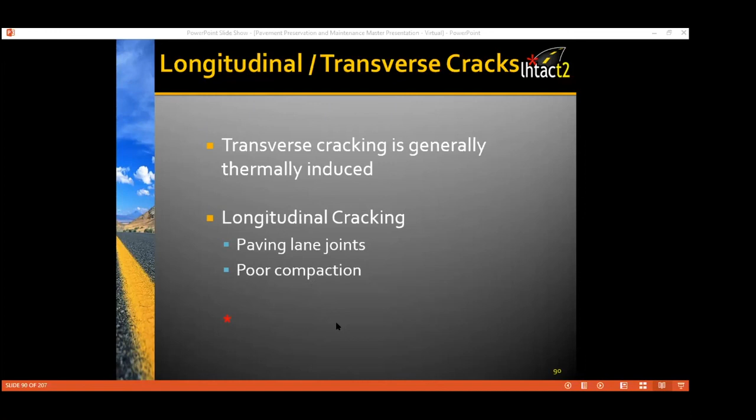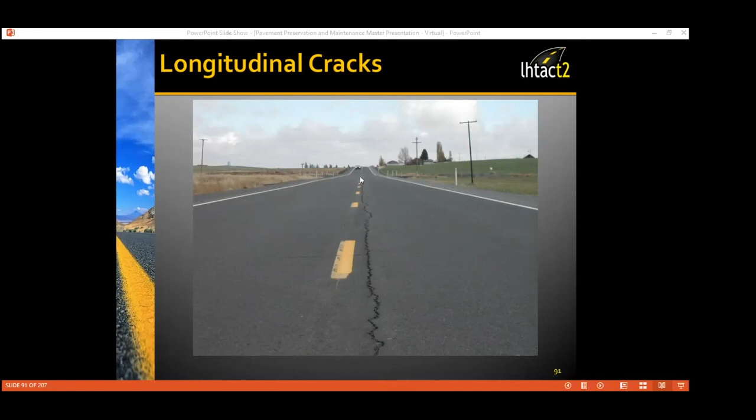So again, here's a picture of longitudinal cracking, and you can see this makes a lot of sense. Typically the roadway is built a half at a time, and I would say that not a very good job was done when the joint was constructed. So again, it's really important to have some kind of quality assurance program, a testing or inspection type program in place when new construction is taking place, because once the contractor leaves, you have to maintain it.

When we think about the type of pavement distress that we put in the category of weathering or raveling, we think about aggregate and how we're losing the aggregate on the surface of the pavement. Weathering and raveling can be caused by poor compaction, cold wet weather construction—so construction took place at the wrong time of year under bad climate conditions—and dirty aggregate will cause raveling. We don't have good adhesion of the asphalt to the aggregate, and if those aggregate particles are not well coated and the asphalt cannot stick to them, the aggregate will start to strip away and ravel. That's usually called stripping. If the content of asphalt is low in the mix design, that will contribute to raveling as well.

Or if the mix was overheated, if it came out of the plant cooked, it won't be long before we see raveling and weathering taking place on the plant mix itself. So if you're out there doing construction and inspecting the project, and you have a load of plant mix that shows up looking cooked or brown, something's really wrong at the plant. It's best to just shut everything down and try to figure out what's going on.

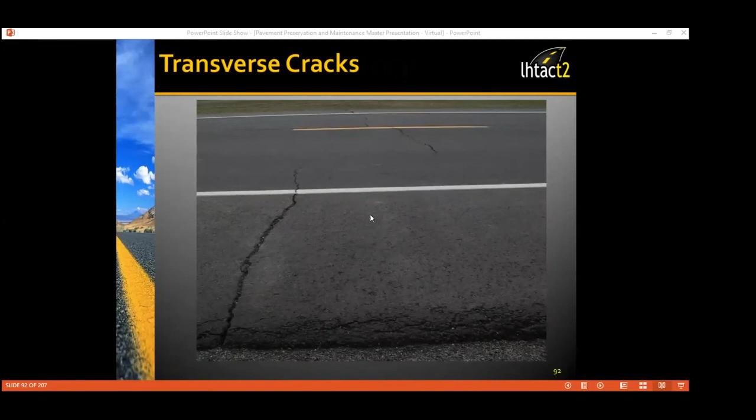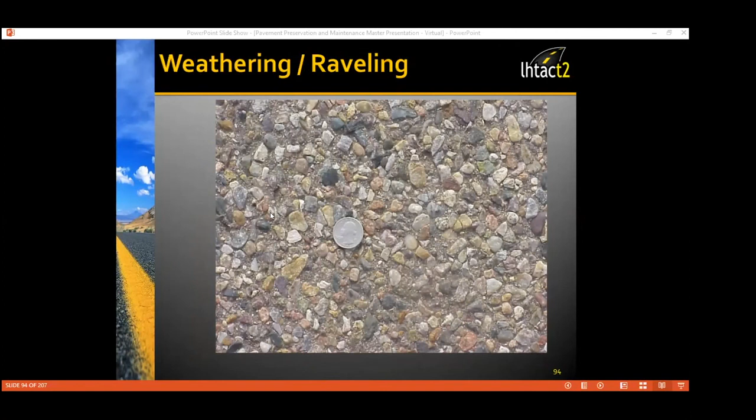Here's a picture of a pavement surface where you can see weathering and raveling, and the aggregate is exposed. The particles are not well coated. You can see on this surface, even though we've got cracking, you don't see aggregate particles standing on the surface like you do when it's raveled and weathered like this. The asphalt has departed from around the aggregate. Perhaps the aggregate was dirty, or the plant mix was cooked - just a number of those things I talked about earlier.

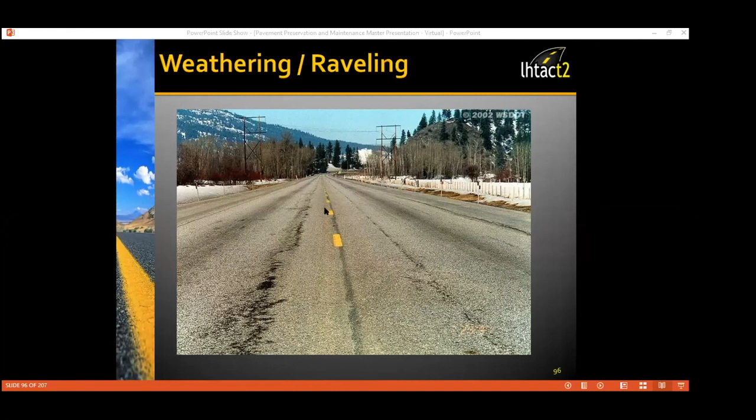Here's another picture of weathering and raveling. We might have a longitudinal joint that's given us some problems here, but you can see that this pavement will deteriorate quite rapidly from this point forward.

So other distresses in our pavement include bleeding. We've probably all seen some kind of bleeding pavement where it's over-asphalted and the asphalt flushes up to the surface. Bleeding is kind of hard to combat. You try to blot it - some people try to blot it with sand or something, but it's kind of hard to correct.

Other distresses are bumps and sags in the pavement. A lot of times the sags are associated with utility cuts. Other pavement distresses are corrugations and shoving - we've talked about shoving a little bit earlier - depressions, lane shoulder drop-offs, patching and utility cuts can be real big.

In another workshop I do, we talk about utility cuts and how when the pavement is cut and the trench is dug, you lose a lot of the support of the underlying layers below the pavement. So when it's patched back together, typically there's poor compaction of the material put back into the trench. It's not compacted properly, and it won't be long before you have some kind of sag or dip in the pavement. Polished aggregate is kind of a function of the asphalt leaving the aggregate.

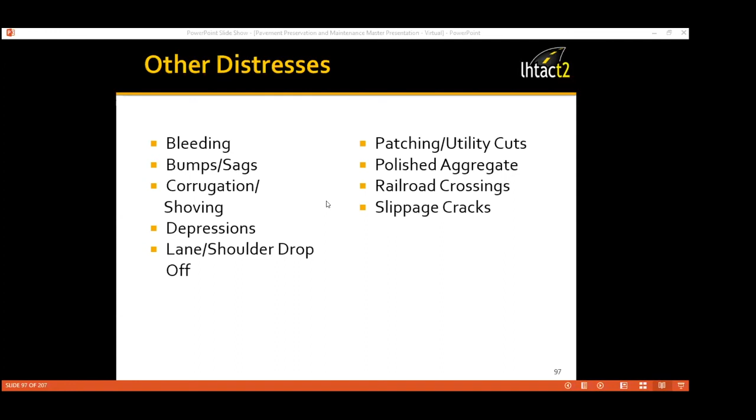You just have that surface of the aggregate exposed, and it's polished up by the traffic. Railroad crossings are a big pavement distress issue as the pavement bumps up to the crossing itself. We also have slippage type cracks, where working cracks from traffic loading - especially with steep uphill grades - might cause cracks from the actual pavement shoving and slipping itself. So those are just some of the other distresses.

So when we look at preservation candidates for various types of pavement fixes, we can use preservation treatments, but we want to apply those treatments when pavements are in fairly good condition and the corrective actions required are only on a small area of the total pavement. Those are good candidates for our preservation program. Pavements that are not good candidates for preservation are pavements in poor condition - you've got to do substantial repairs, and you've got real bad structural problems with the pavement.

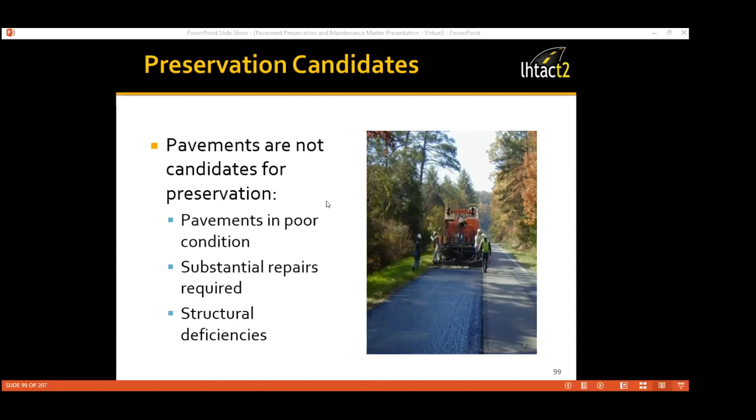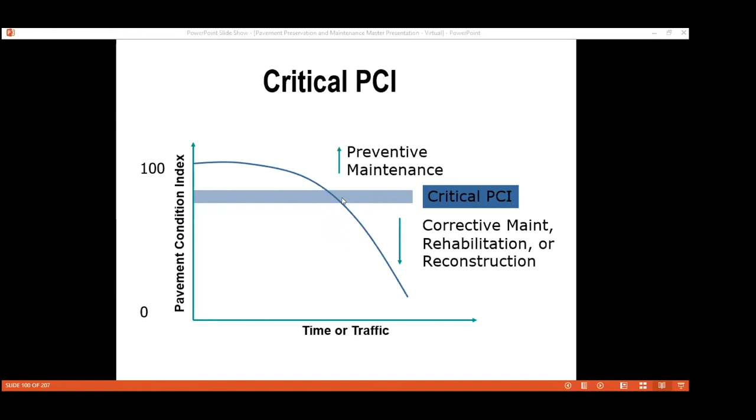Sorry to bring the curve back up, but I can't pound this home enough: preventative maintenance happens in this upper part of the curve, when our PCI index and critical PCI was right in the 60 to 70 number range. We want to stay on top of things and do preventative maintenance, it's going to cost us a whole lot less money. Corrective maintenance in the form of rehabilitation or reconstruction takes place when the curve deteriorates rapidly down to a lower PCI number. So when we get to that midpoint, the critical PCI, the curve is not linear and our pavements will deteriorate very rapidly.

So we want to be able to recognize pavement distresses. We've made an attempt to really try to recognize some of those asphalt pavement distresses and what some of the causation is. We'd like to know the causes of the main types of distress and determine which pavements are good candidates for pavement preservation. Pavement cracking that's left unattended is going to lead very quickly to expensive pavement defects and repairs, and you'll start to see your money go down the drain.

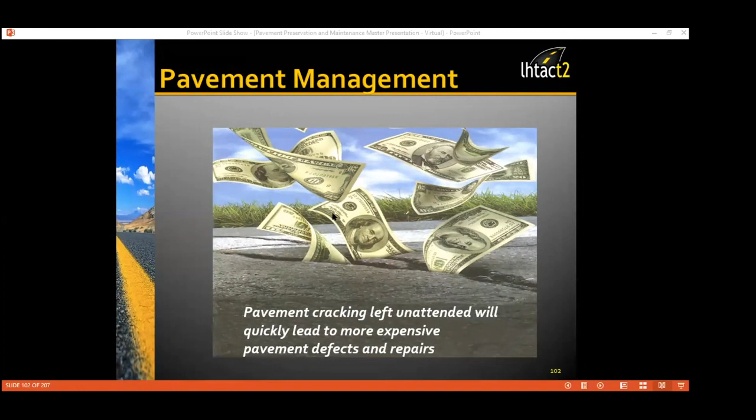So with that, let's open it back up. Lori, are there any questions or comments? This is kind of hard in the virtual environment because I usually have a lot of interaction going back and forth on this. But if you have any questions or comments or thoughts, I'd like to hear them. If you'd like to ask a question, click unmute on the bottom left side of your screen, or use the chat box if you'd like. Doesn't seem like we have any questions right now. Quiet crowd today. Well, and that's it with virtual. So of all those examples that I showed you, do any of those look familiar as far as the types of pavement distresses that you have on your system?

Are many of you faced with shoving and rutted pavements? Christopher Owens put mostly the alligator. Okay, yeah, that's the most common type. And then Stephen Morgan said yes to your last question, and Dallas Paul said no. Okay, all right, yeah, some do and some don't.